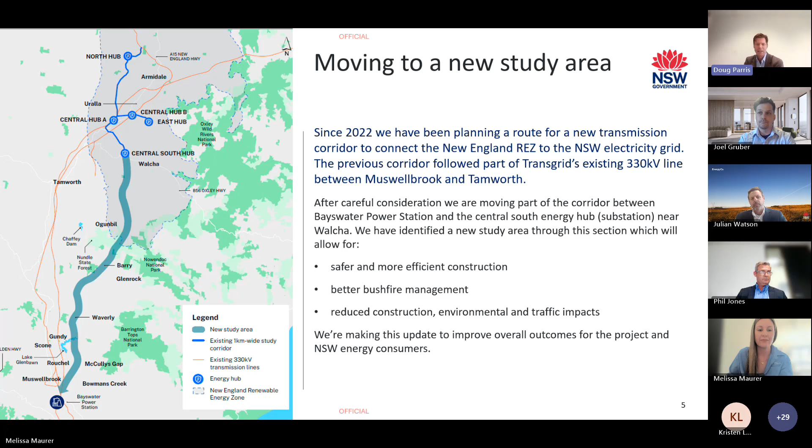Afterwards. So Mel, we can jump to the next slide. I don't plan to read every slide to everyone, by the way - that doesn't seem like a good use of time.

That's the stage we're at now. As we roll forward, we'd move into a more detailed and refined corridor for the EIS, the environmental impact statement, and then ultimately our network operator, the entity that will design, build and operate the project, will do the final detailed design. So there's a bit of a journey in the design development process.

I think the key point on this slide is that we progressively do more detailed work as we develop, and we need to consider and respond to the information that we find from that detailed work. In this instance, for this project, that more detailed work has identified some material challenges that we've needed to take into account. Let's come to the next slide.

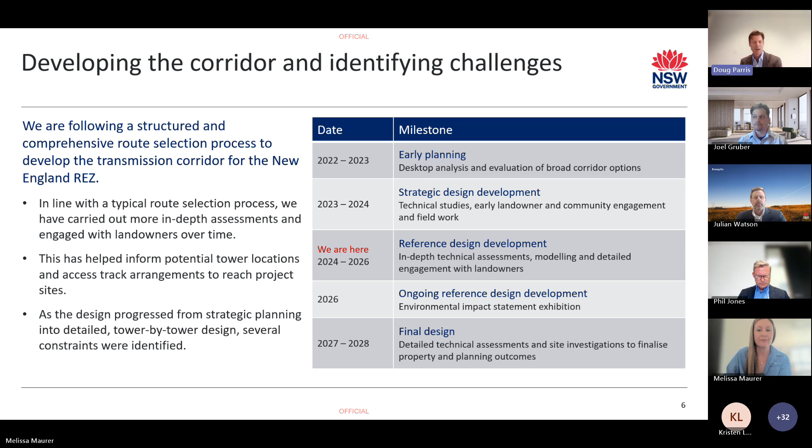So we start with the towers. We're essentially assembling large towers - they're tall, 70 to 80 meters, and they need large cranes to assemble them and put them into place. Those cranes need a flat pad, and the towers themselves need a firm, typically flat, foundation. If you can imagine a pad that's about 70 meters by 50 meters, that's close to 3/4 of a football pitch as a flat surface.

That's the preferred, desirable layout. If we can't get that, we can split it up, but that tends to make work go a bit slower - it's just a little less efficient. When it comes to excavating, if you picture that pad on the side of a hill rather than on top of a hill or a nice flat area, we need to excavate to flatten that out, so that's quite a lot of excavation.

Excavation generally leads to surplus rock, and if that rock can't be reused on site - and there's fairly limited opportunity to use it on site, maybe on some access tracks, but that's probably about it - then it needs to be taken away by truck and disposed of somewhere, which generates a lot of truck movements we need to think about. Access tracks are how we move people, plant and equipment up to those locations, and a steep track has limits on what you can get up it - at some point you can't get the heavy equipment we want up there.

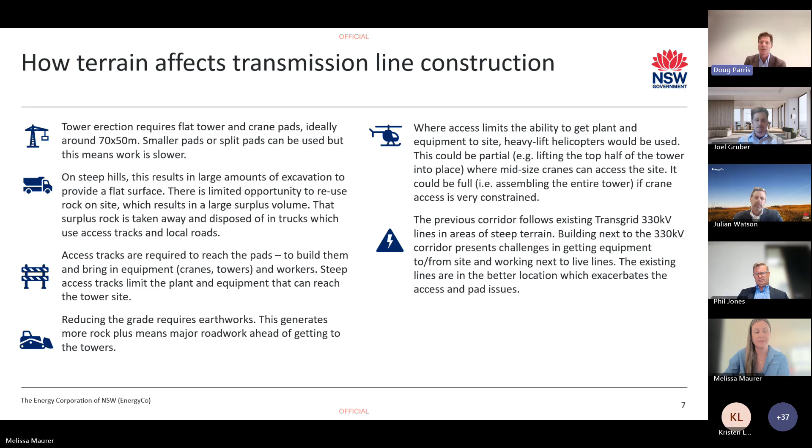Trying to get heavy equipment in and around operating lines has its own challenge. Excavating, particularly if you need blasting of rock - we've got a fair bit of granite around - blasting near operating lines has its own risk considerations, and equally using helicopters in and around operating lines can be done, it just brings in different risks and safety elements for us to think about.

One is those water sources for aerial firefighting - Chaffey Dam and Lake Glenbawn were relevant areas to weigh up as challenges. The other is the orange area you can see there, which represents areas with constructability challenges - areas of steep terrain where we're looking at how we actually build.

The main thing to note on that map is it's not confined to one small area, it's quite extensive - particularly focused on the area between Bayswater and where we get to the REZ boundary. You can see it's south of Lake Glenbawn, a decent area to the north of Lake Glenbawn, an extended area up to Walcha, and an area from just north of Chaffey Dam, around Woolooma up to Bendemeer.

There's a lot of text on the right that I'm not going to read. It tends to be an extension of the previous slide, taking those challenges and constraints we're looking at. This is a summary, and it's in the fact sheet, so I won't reread it all. It's the conclusions about the challenges to the previous corridor.

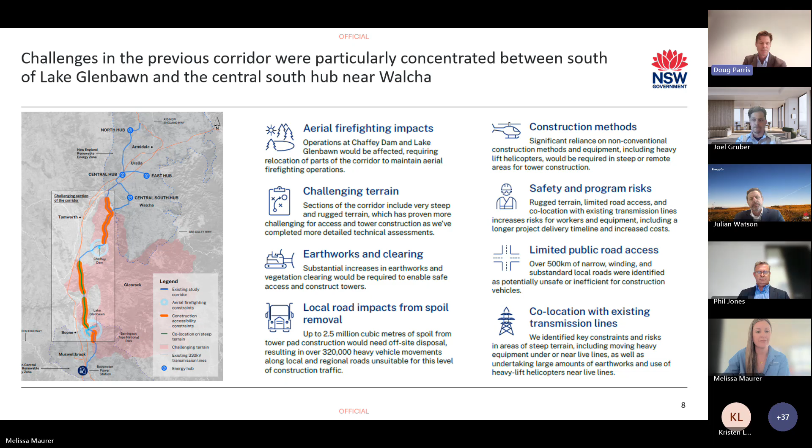Jump to the next slide, thanks Mel. So these challenges led us to look at a few different things. Firstly, we looked at refining the design in the existing corridor, and I'll come back to that. We also looked at alternative corridors, those we'd looked at previously, and we were also having a think about a new corridor as well.

An observation on this: within the REZ, from the REZ boundary on the plateau, up to the central south hub, we have three routes that are fairly close to each other - Midwest, the TSR, and the new study corridor. South of that, though, they're quite different as far as how we actually get from Bayswater up onto the plateau. That's a big differentiator, dealing with that challenging terrain I was talking about on the previous slide.

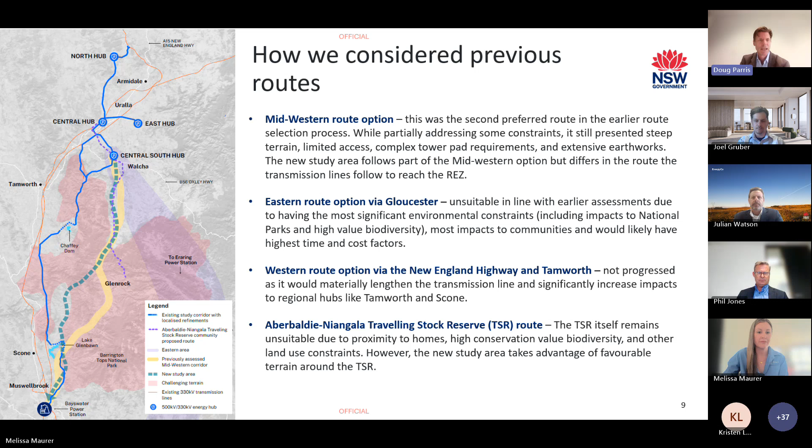Jump to the next one, Mel. Thank you. So yeah, we did look at refinements to the existing corridor. What we mean by that is seeing whether we could make changes and address those areas - the aerial firefighting operations, the challenging terrain, the constructability challenges we had generally within that corridor. That looks at things like moving towers, longer spans, different foundation types, different construction methods and equipment, weighing those up as alternatives to address those challenges and constraints through that area.

What we found through that is they tended to partially address the issues. Because of the extent of where those challenges are, you could sort out the southern part, but you hadn't really sorted the northern part unless you actually started looking at effectively a new corridor. That obviously led us to have a look at moving to a new study area, which is clearly what we've announced and why we're holding this webinar.

So for those options, we did look at them across a range of criteria. We call them our planning pillars. They align with the transmission planning guidelines - environmental, technical, community, strategic and economic pillars.

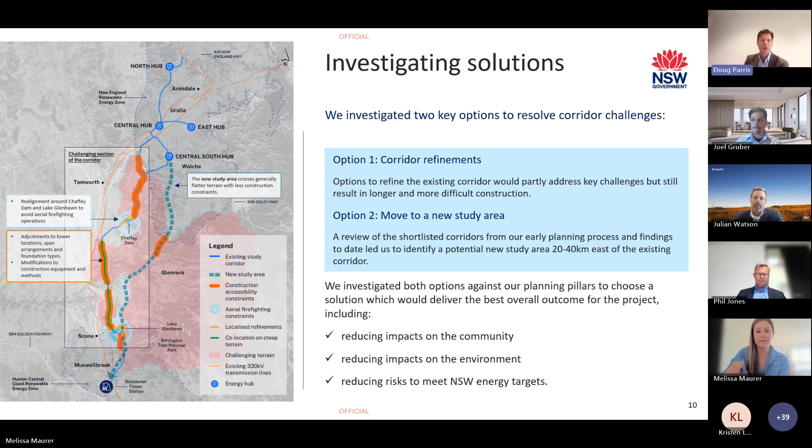I can jump to the next one. Thanks Mel, starting to read my mind. I like it. So we have published the report that is on our website - I think we published it just last week. That's to share the analysis and the metrics behind the decision that led to us changing the corridors. That was a rigorous process.

We have also had an independent review panel challenge that work and review the work as we'd done it, to challenge and inform whether we'd actually thought about things the right way.

Ultimately, they concluded the same as we did. That was an independent review panel that was used to work through, and challenge and validate the work we'd done.

So this report's provided for transparency. It's not to re-prosecute the decision, but there's obviously a lot of interest in understanding why we've concluded what we've concluded. There are some redactions in it. I know people would prefer that they were not, and we've tried to limit that. There's some information that's commercially sensitive, related to where we are in our network operator procurement process. It's mostly around cost.

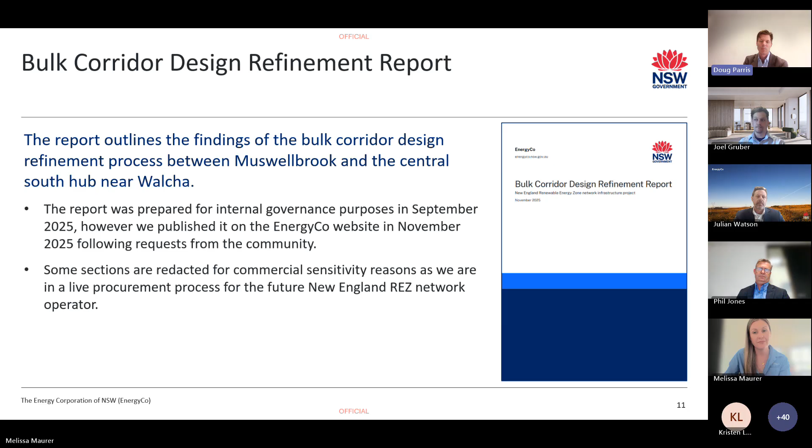We'll jump to the next slide. Cost, like I said, is one of those areas that we've redacted. You can see on the right the broad conclusions reached in this report. This is a very high level summary, but the broad conclusions are that with less challenging terrain, improved access, and reduced volume of earthworks, which also maps to time and the number of trucks and surplus materials we need to carry.

Less clearing of vegetation relates to biodiversity offset costs. Better access has a component relating to doing earthworks, a component to do with productivity, and to the extent that we can get more conventional tower construction, that's generally a good thing.

And when I say conventional, that's using cranes, which is probably the most efficient way for us to build the towers, to the extent we still have some limitations. I should be clear, it's not like we've resolved every challenge in this corridor - it's just materially improved, but there are still some very challenging terrain areas we need to resolve. So these are metrics that typically are improved rather than totally resolved.

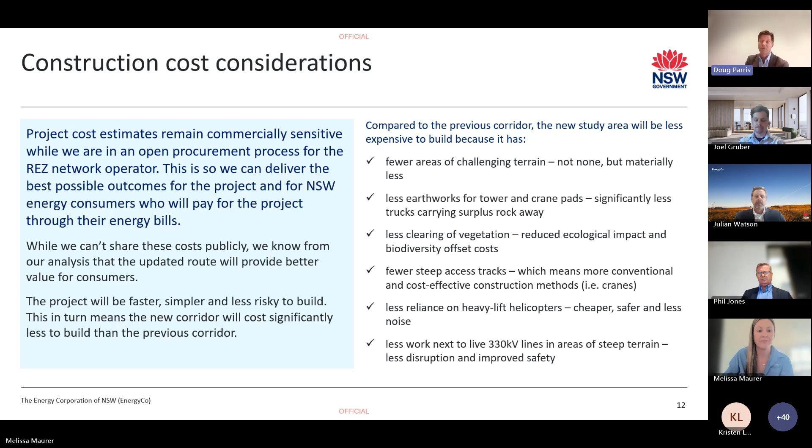Really appreciate that overview. So now we're going to move into the environmental and land use considerations. Welcome to Phil Jones, our planning and environment lead. Over to you, Phil.

Thanks, Doug. Good evening, everyone. I'm Phil Jones, EnergyCo's planning and environment lead for the New England project. I'm just going to take us through some of the environmental and land use considerations we considered, and in particular some more detail on the aviation constraints we had around Chaffey Dam and Lake Glenbawn, and how we considered those in our assessment.

So in broad terms, how we consider bushfire risk for the project - we engage with emergency services, in particular rural fire services, as well as other emergency service operators during all stages of the project. During the initial planning stage that we're in now, we'll continue to work with all key stakeholders through the construction and operation phases.

In broad terms, we consider a range of factors in our bushfire assessments - things like the history of bushfires in an area, mapped bushfire-prone land in the landscape, the density and type of vegetation, topography, access, and a range of other factors that affect bushfire risk when we're planning the route.

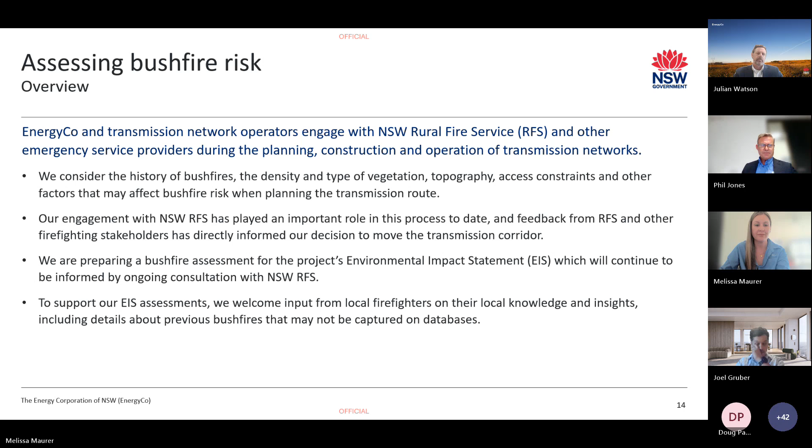We heard recently that the community was keen to get more information on our engagement with RFS and other stakeholders in relation to those key constraints we identified around Chaffey Dam and Lake Glenbawn. This slide goes into some of the engagement we had with stakeholders as we planned the route. From late last year, it was identified through our engagement with the community and with RFS and other stakeholders that there were potential constraints around both of the dams.

In earnest, at the end of last year, we commenced detailed consultations with RFS's State Operations Branch, as well as their Northwestern Area Command. What we wanted to understand was how both reservoirs are used for aviation-related bushfire fighting. What we heard was that RFS used the dams for rotary wing aircraft, but importantly, there's a couple of local operators, Pays Air Services and Kennedy Air, that use both Chaffey Dam and Lake Glenbawn for fixed wing bushfire fighting purposes.

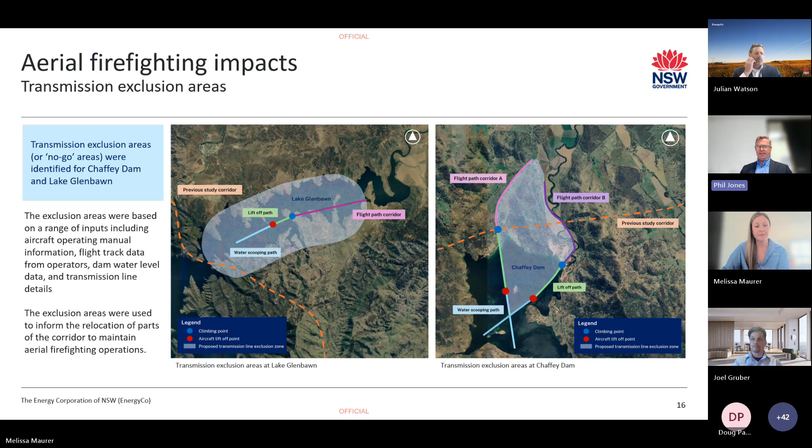I'm going to move to the next slide. We used a range of inputs into our aviation assessment, which we developed with inputs from Pays and Kennedy Air, as well as Water New South Wales on dam water levels, and RFS. Some of the inputs were flight performance information from detailed flight paths obtained from the operators, flight data from the original equipment manufacturers' operating manuals for the Fireboss aircraft, as well as the Water New South Wales information regarding dam water levels.

We were able to get flight track data from actual bushfire fighting events at Chaffey Dam from December of last year, and some data from Lake Glenbawn provided from 2023. So we were able to use real world data in developing these exclusion zones. Some of the assumptions are listed on the right - essentially what we tried to do was take a very conservative approach to our assessment, because we didn't want to compromise firefighting operations at the dams in all prevailing weather conditions.

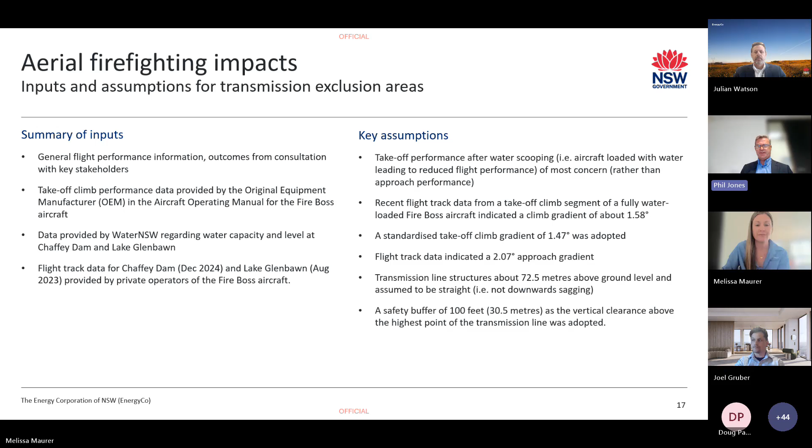Moving on to some of the other broader environmental and land use criteria we considered through our assessment in the bulk corridor design refinement report. As Doug said, we assessed the route using multi-criteria analysis, using a range of criteria against our key planning pillars. From an environmental point of view, this included important agricultural land, including mapped BSAL or biophysical strategic agricultural land, as well as critical industry clusters, which are mapped in the New South Wales Government's strategic regional land use plans.

In terms of BSAL, the revised study corridor does pass through substantially less BSAL than the previous corridor, around 140 hectares less. There is more equine CIC on the new corridor, which is concentrated in those areas to the south. In terms of agriculture in general, the new study corridor does pass through about 900 hectares less agricultural land, and also about 80 hectares less cropping land in total.

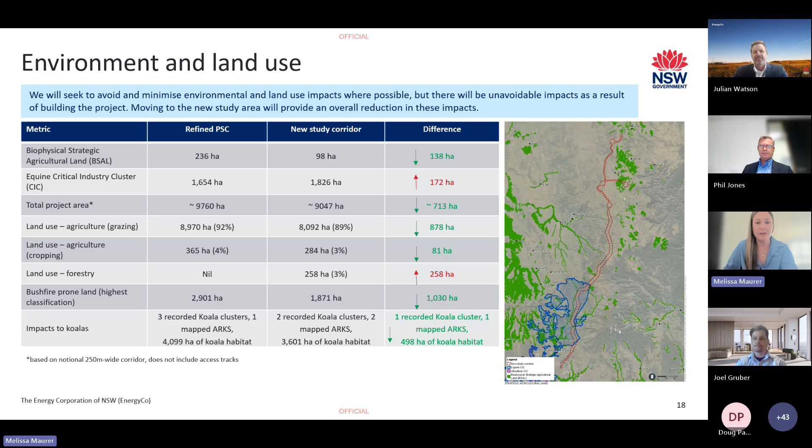Just testing my microphone, just making sure that I'm clear, everyone can hear. That's great, loud and clear. Thanks, Mel. So as Mel mentioned, I'm Joel Gruber. I'm the design technical lead for the New England REZ project.

On this slide, we've got a bit of an overview of some of the key statistics here, which we'll go into a little bit more detail on upcoming slides.

Just want to take a moment here to talk about the process. Doug mentioned early on that in terms of the typical design process, when you're starting through looking at arrangements for these large-scale infrastructure projects, you take an early stage, you look at projects in terms of a strategic design development lens. And so you're using sort of high-level comparison tools for options assessments. You're basing it on line lengths and components through there. What these statistics are coming from is that next level of detail that we did, where we were coming away from those high-level strategic design developments, looking at specific arrangements in terms of the transmission line alignment, looking at tower pad configuration, doing civil earthworks modeling, doing access track modeling to get some comparisons through there.

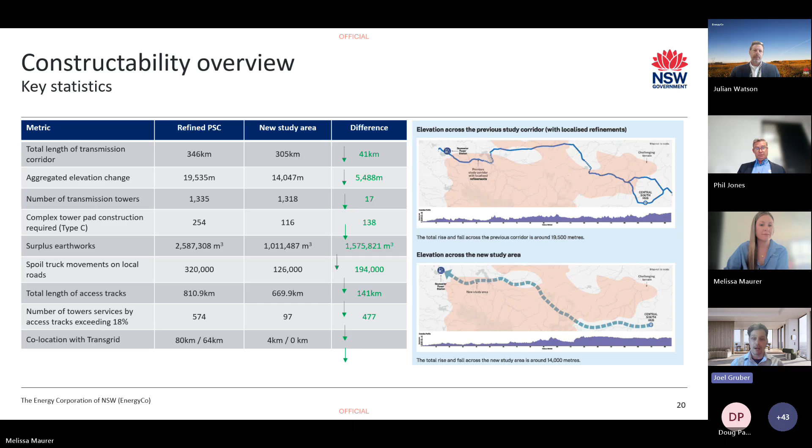Maybe just go to the next slide. Thanks, Mel. So going through some of these items in detail, the first one there is noting about aggregate elevation. So when we're designing transmission lines, they need a particular arrangement to have efficiency of design and to find viable alignments. So transmission lines are typically the most economical when they're between 400 or 600 metre span.

So that's where towers are located in that sort of area, and then the transmission line conductor is able to sag between those two transmission towers. So when we've got very undulating terrain, or terrain that goes up and down considerably, it's hard to find locations to site those transmission line towers. So what ends up happening is you end up having to locate transmission line towers on the side of hills, on the side of mountains. You end up having clashes with the conductor as it sags between transmission lines.

So you end up having to have more transmission line towers and arrangements through there. On the new study corridor, there's significantly less aggregate elevation, meaning we're adding up the cumulative ups and downs along the alignment. That essentially shows there's a better transmission line route, able to site towers so you can have more efficient tower design, where conductors can span between towers while meeting minimum ground requirements. This also lends into arrangements coming up about civil earthworks and tower pads.

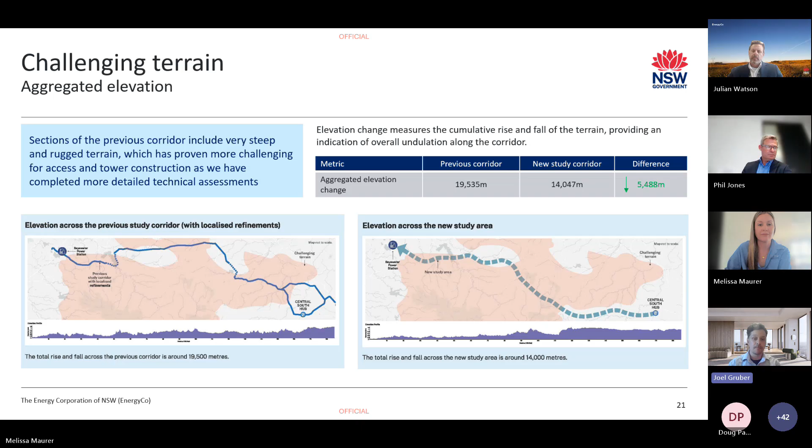In terms of access tracks, this ties into the amount of towers needed. On the previous study corridor, some sections were co-located with the Transgrid line, so we looked at whether we could utilize those existing access tracks. What we found is some may be suitable, but a majority, quite a large number of them, wouldn't have suited the purpose, or the alignment in terms of where to put those access tracks wasn't able to be used.

The existing Transgrid line located itself taking the best route through the undulating terrain, which meant we had to sit adjacent to it. In some cases, that meant we were on the side of mountains, side of very steep terrain, which meant new access tracks would need to be built to access through there. So there was a significant drop in the amount of access track needed, even considering utilization of existing access tracks or goat tracks on the existing Transgrid network.

There was also consideration for grades. As David mentioned at the beginning, less than 14% is generally suitable for conventional construction methodologies. As you go further up, slopes exceeding 18% typically require non-conventional construction methodology. That doesn't mean you can't do it, however it slows down productivity and arrangements, and there's a quantum about how often or for how many lengths you have to do it in terms of maintaining a viable and prudent transmission line alignment.

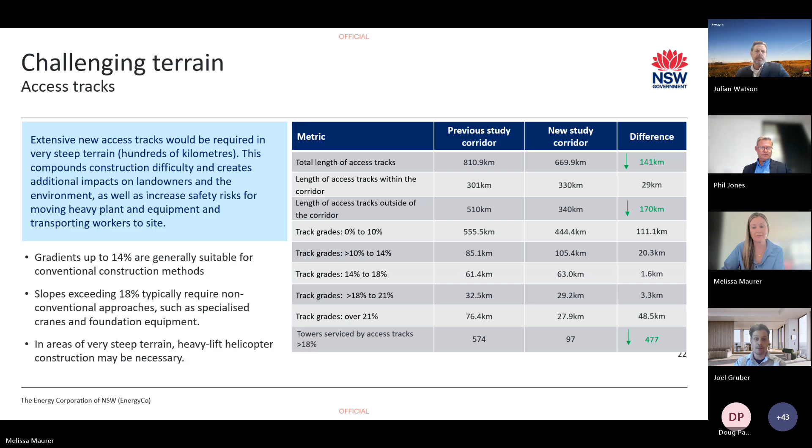This one indicates when we've got a transmission line tower, we need a tower pad. Initially, the easiest way is to just make a large flat area. In locations with undulating terrain, you may be better off having a stepped tower pad, meaning a tiered approach for some of those tower pads, which reduces down some of the civil earthworks.

In conjunction with the next slide on overall earthworks quantities, you can see that pad type C was used more in the previous study corridor. We're trying to really work the design hard, utilizing a more complex pad to reduce earthworks, but it still results in quite a large earthwork delta between the two. Effort was made here to minimize earthworks and minimize what was happening with the tower pads, resulting in a movement from pad type C and pad type B into pad type A, meaning a simpler construction methodology and more viable transmission line design.

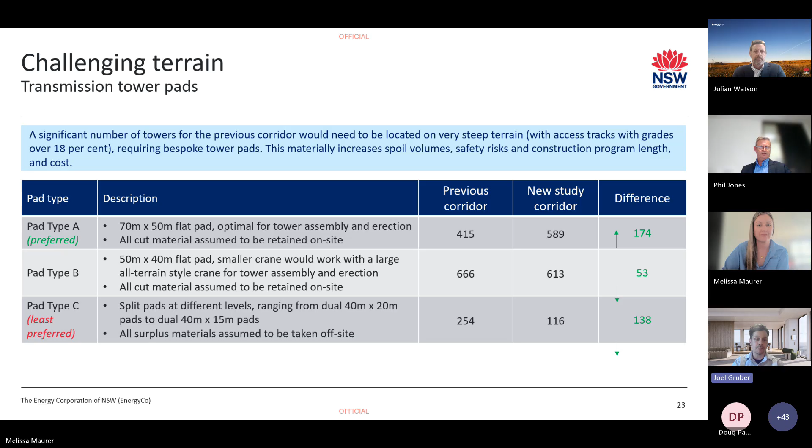Okay, all of those items together work into earthworks, the amount of earthworks needed to build the line, which comes to where you locate towers, the slope and steepness of where you're locating those towers in terms of what you have to excavate to have a location where transmission towers can be built, as well as access tracks to locate those towers.

From that, you can see a considerable difference between the new study corridor versus the previous study corridor. When you come to big numbers like this, it's sometimes hard to get a magnitude of how big that is. So, 1.5 million cubic meters - if you take a football field, 120 by 70 meters, that's essentially 180 meters high of fill. So you've got a football field with 180 meters high worth of fill on top of that. Indicatively, that's the sort of number we're saving there.

So it was a considerable amount of earthworks that you're saving in terms of alignment arrangements associated with tower pad modeling and access track arrangements.

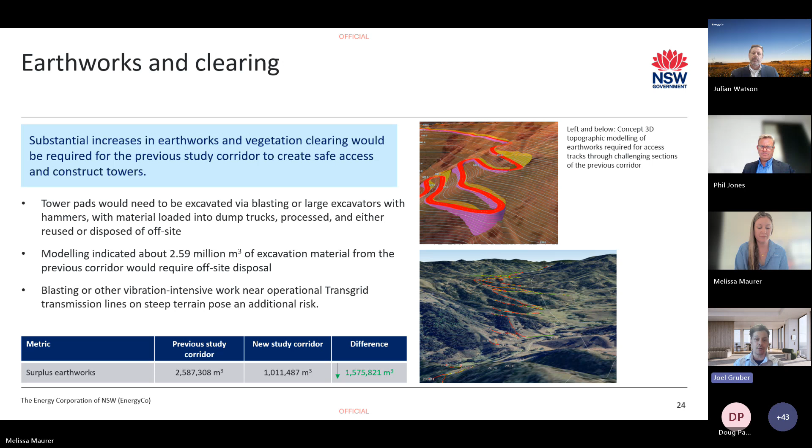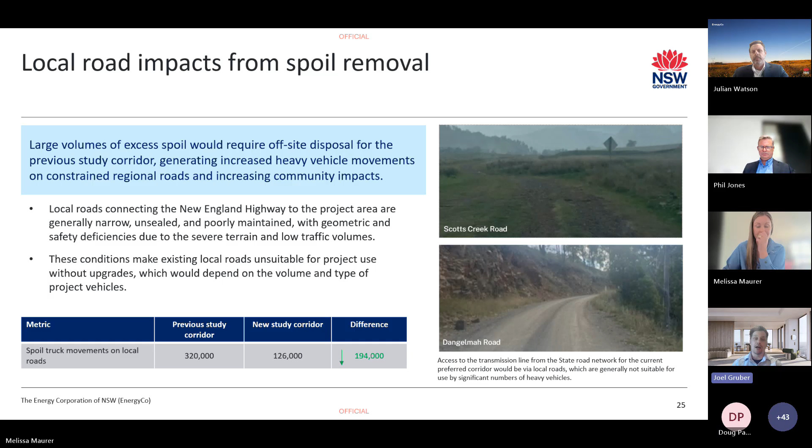Thanks, Melissa. So a reduction of earthworks means a reduction of construction vehicles that need to move that earthworks, time, duration on local roads and the like. This is directly equatable to the amount of earthworks that was saved. We're reducing spoil truck movements, which reduces the impacts on local roads, those movements going between locations to be able to move around. It also has benefits for construction, constructability timeframes, and the like.

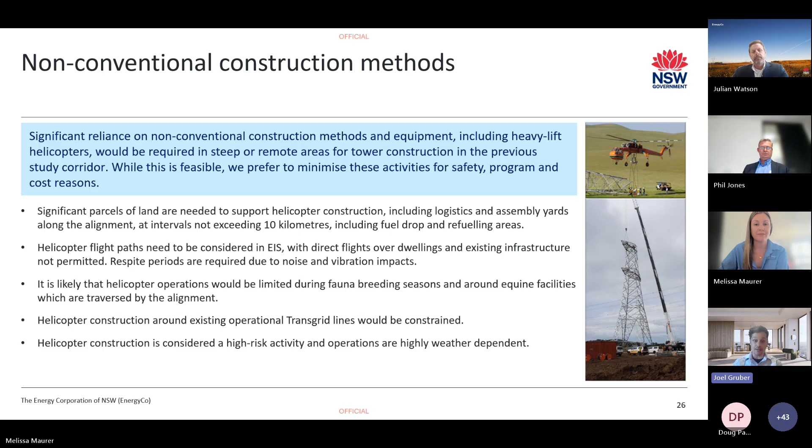In assessment for constructability, there was a view that helicopter operations would likely be limited by several things, including fauna breeding seasons, limitations to operations, equine facilities, and the like. Lastly, the combination of undulating, difficult terrain alongside the existing Transgrid lines would mean potentially having helicopter construction adjacent to a live transmission line, which has a number of safety implications. It's a high risk activity. The quantum of locations where this may be required was a significant risk, and it's another benefit of the new alignment - the updated study corridor drops away that dependency.

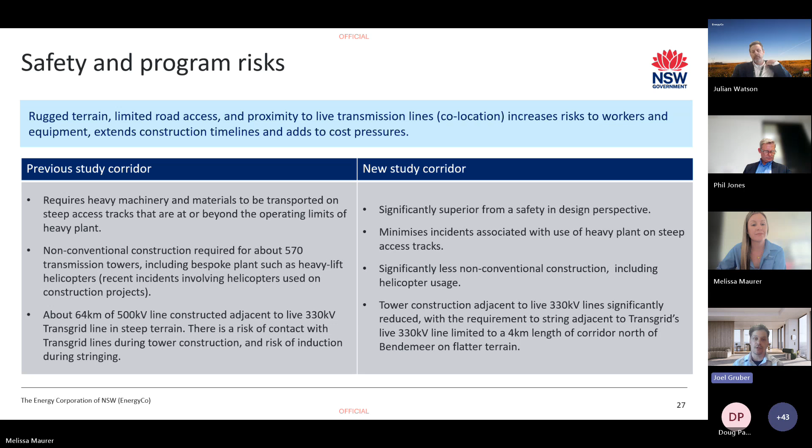Another little bit of input on co-location with existing transmission lines, which I think I've covered previously. Essentially it's the safety risk of having non-conventional construction methodologies next to an existing Transgrid line, particularly on the side of hills, because that existing Transgrid line has picked out some of the best locations to traverse the undulating terrain, which means we get pushed onto more of the slope of the side of the mountain, and there are impacts in terms of that.

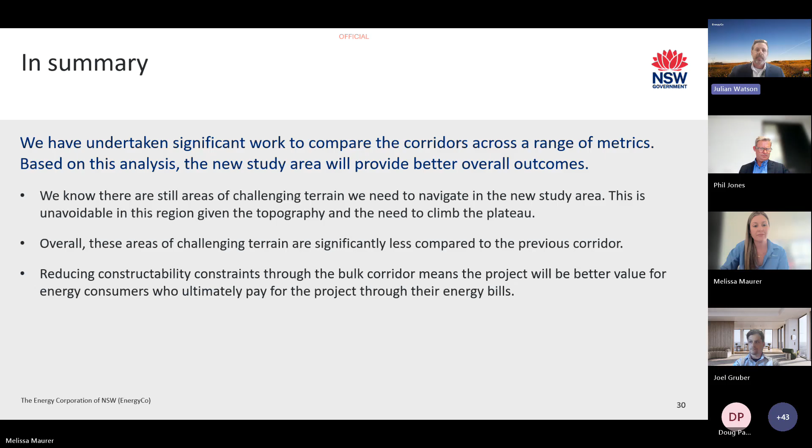Community feedback is really critical to informing the development of the project. Many of you will know we have an open have-your-say period at the moment, so we've extended that for 2 weeks, closing on Friday the 12th of December. We're really keen to have a conversation with landowners or communities on how you use your land, and to hear your views. We want to consider all that feedback as we refine our 3-kilometre corridor down to a 1-kilometre wide corridor early in 2026.

From our perspective, we've started some of those conversations with some landowners and communities. We're already working away to see what we can work out based on the really good feedback we've got from people to date, and hope to continue that with more folks as we move forward. After the consultation period, we'll develop a report outlining the key topics community have raised and EnergyCo's broad responses, which we'll share once finalised. We also continue to welcome community feedback on an ongoing basis as we develop the project.

Just about the scoping report - we've received a fair bit of commentary on it. Important to note it'll be a standalone document, and doesn't assess the project in detail. The aim of the scoping report is to describe the project in simple terms, include an analysis of feasible alternatives we've considered, and provide an early indication of some community views. One of the really key things is that it identifies key matters that planning and other agencies will require us to undertake further assessment on in the EIS. Agencies will use that to outline the approach EnergyCo will use, or comment on our proposed approach, so that we've got proper regard to any relevant government legislation, plans, policies or guidelines. It's a really important part of the process, and we're aiming to have that out later this year.